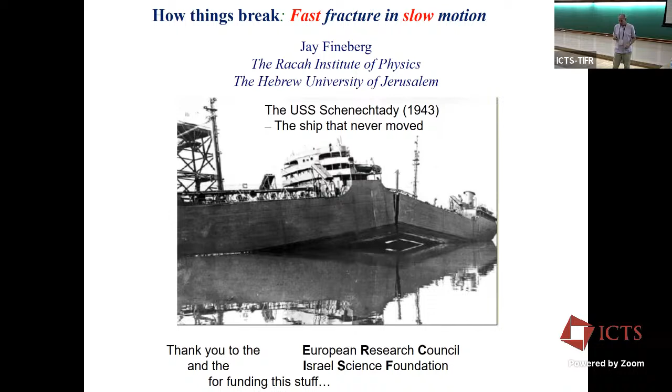Okay, so first I want to tell you why cracks are interesting, and then I'll briefly tell you how they're supposed to behave according to the standard or classical theories. And then we'll have a happy - this is a manic depressive talk.

The happy part now is that I'll show you that yes, they work when they're supposed to work. The theory is wonderful and everybody can go home. But then I'll show you when things stop working. These are crack instabilities, which are not included in standard theories of fracture, not even in unstandard theories of fracture. That's when nature stops reading the textbooks.

I'll try to zoom in on these things by talking about fast fracture in slow motion. Gels were mentioned earlier. We'll be looking at soft materials—maybe that's why I'm here. Soft materials have many characteristics, but the useful one here is that they're soft, so the speeds of sound are meters per second instead of kilometers per second, which lets us capture very rapid effects in slow motion and hopefully understand them. I'll finish with a new theory for nonlinear fracture mechanics, a non-trivial extension of the classical theory, which I'll talk about here.

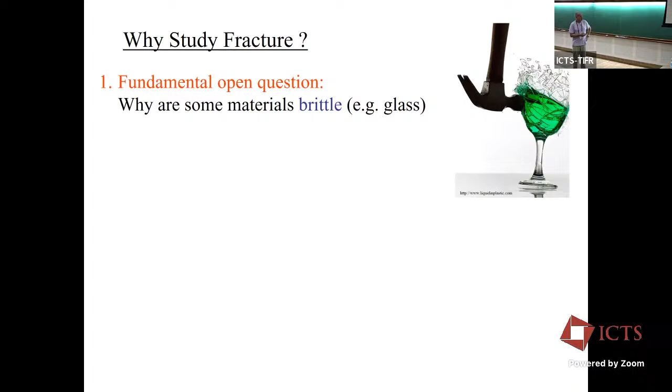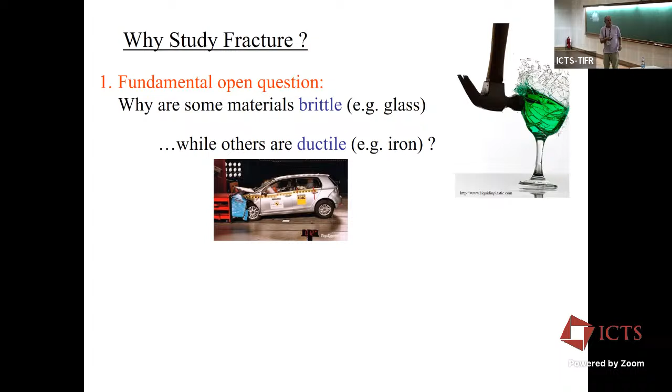Why should we study fracture at all? Well, first, it's kind of neat to be paid to break things for a living, but there are a number of fundamental open questions. For example, why are some materials brittle, like glass, where others you make buildings out of, or cars? The elastic properties of this and that are virtually the same, so what's the difference between a brittle material and a ductile material—something useful for building cars versus something useful for other things?

I'll show you that the theory of dynamic brittle fracture is incomplete, and these are some of the important unresolved questions. First, the criterion for where the crack decides to go—the crack starts to move, but to where? I'll talk a little bit about that.

Then what happens when a crack—we'll talk about theories in a two-dimensional world where we're looking at a one-dimensional branch cut or defect running through the material—but what happens when that one-dimensional point at the tip of a crack becomes spatially extended, so it's a crack front? What happens if you break the crack front? Again, this is the classic situation where the theory of fracture is a spherical cow, and little by little we're starting to make it an elliptical cow or something of that nature.

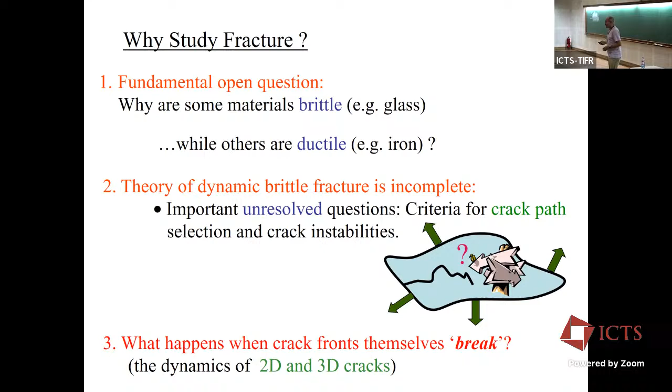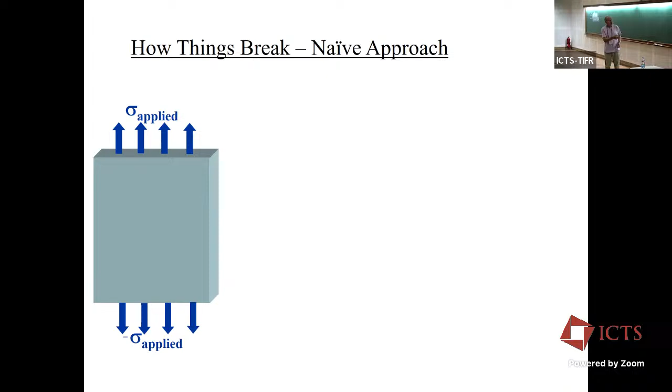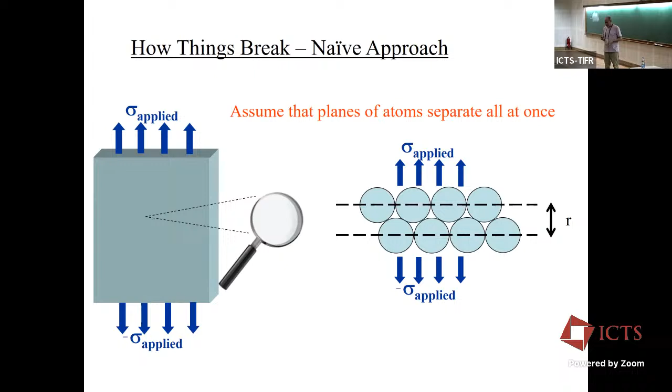Okay, how do things break? Well, the naive approach is you stretch something, apply a force, and pull the atoms, molecules, grains, or whatever apart in a homogeneous way. If you pull them far enough, they'll disassociate. So that makes sense—that's how things could break. Now, here's a potential between particles, atoms, whatever, and if you do the calculation, you find that approximately a 50% strain is needed in order to break something. So if you pull things homogeneously and slowly, you'll have to stretch it by 50% for dissociation to start. Okay, that's fine, things can break that way. But something's wrong in this picture, because usually already at 1% strain, things fracture. So we have two orders of magnitude difference between the naive approach and what happens in reality.

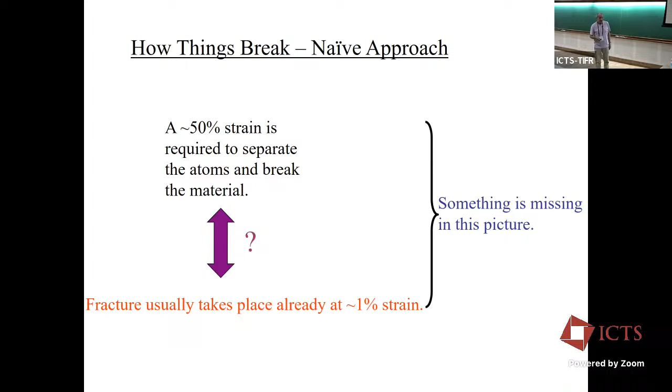Let's see why. The reason was given by Inglis in 1913, when he took a two-dimensional sheet of material—I'll be ignoring the third dimension for a while, so we're looking at a two-dimensional world. He put an elliptical defect into the material and calculated what the stresses are. The applied stress is totally uniform, but what are the stresses at the tips of the long axis of the ellipse? This is what he found: the stress was amplified by a factor of 2 times the length of the ellipse divided by the curvature at its tip, to the power of one half. Okay, so this makes things.

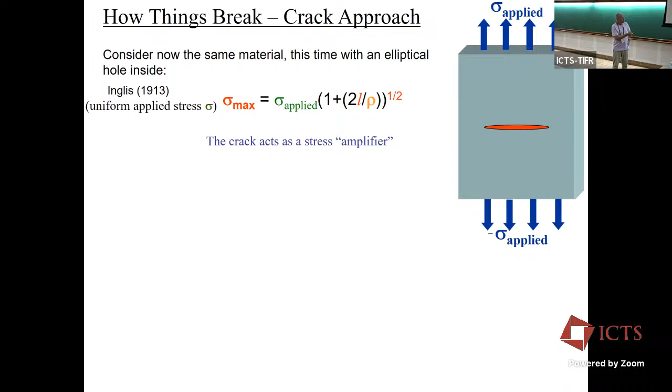Now what happens though if we start to take this ellipse and squash it? The curvature gets larger and larger, or the radius of curvature gets smaller and smaller. So what we find is that if we take the limit of squashing this ellipse to a straight line—this is now a crack—the stress at the tips of the crack becomes singular.

In fact, the stresses go as some factor K, which the experts call the stress intensity factor, divided by the distance R from the tip of the crack to the 1/2 power. So as R goes to 0, the stresses at the tip of the crack become singular. This is the reason that things break at much less stress than one would naively calculate.

And the reason is because this is an honest to God real world singularity. Anytime you have a defect in a material, a crack, you're going to get that singularity at its tip.

Now, you're all familiar with similar things. Some of you might be familiar with singularities in black holes—not talking about that—but we're all familiar from first year physics with the singularity of the electric field at the tip of a point electrode. The pointier you get, the higher the field is. This is slightly different physics, but it's the same idea.

So what cracks do is they focus the elastic energy that's being applied at the boundaries into this singularity. Bonds are not broken uniformly, but in a very efficient manner, kind of like dominoes. This stress singularity will break the material bond after bond right at the tip, and it makes materials much weaker.

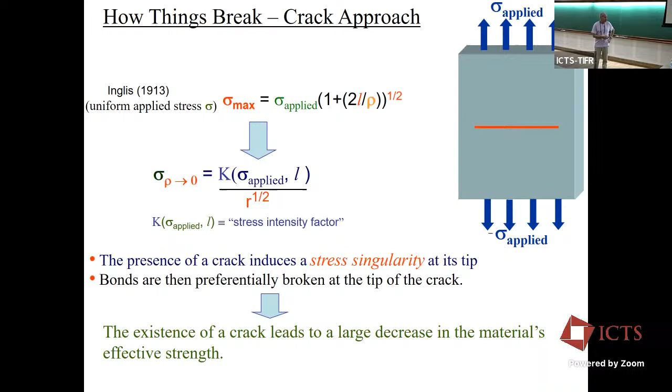So, the bottom line is the existence of a crack leads to a large decrease in a material's effective strength.

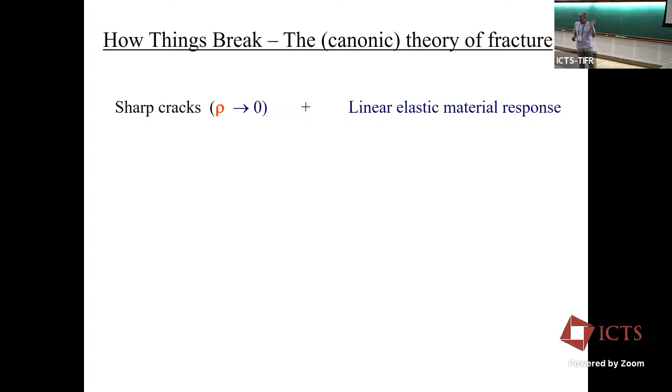Now I'll sketch this out—I'm an Israeli, so we tend to explain things while standing on one foot. If you're unable to explain something while standing on one foot, according to some of our sages, you really don't understand it. So I'll try to give you the quick overview of what's in the theory of fracture, where it comes from.

This theory of fracture is called linear elastic fracture mechanics. The theoretical background is that you have wave equations in the bulk—two wave equations, because we have shear and compressive waves—and they're only coupled at the boundaries. So all of fracture, if you actually solve the problem, is given by solving two uncoupled wave equations that are coupled on the boundary. And the boundary is very non-trivial.

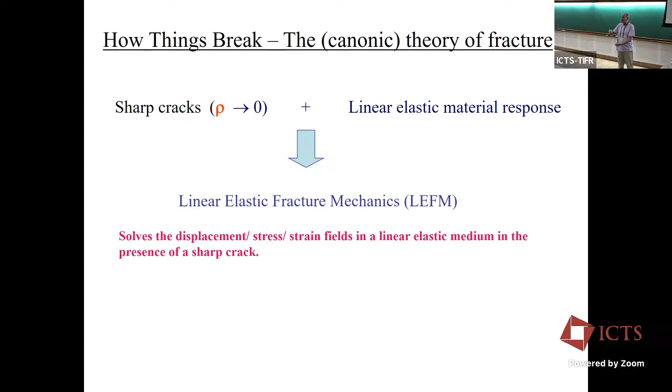We have stress-free conditions in back of the crack because it's broken, so there aren't any stresses in its wake. And there's something called mixed boundary conditions: in front of the crack, you have a displacement condition, how stretched it is. Solving that will give you what I'll tell you about in a minute.

So the main assumptions are that we're talking about small strains—that's where the linear elastic part comes from in linear elastic fracture mechanics. The strains in the material are all very small, and there's an assumption that the strains are small up to where dissipation takes place at the tip of the crack. In fact, the only place where energy is dissipated in this system is where material is broken at the crack tip.

So everywhere around it, life is conservative. And all of the stuff that we really don't understand—this is the proverbial rug under which we sweep all the stuff that we don't know—is contained very near this singularity.

Now, if you solve the problem—solve the two wave equations with these boundary conditions, stress-free and displacement boundary conditions in front of the crack—this is what you get. You get this, like Inglis showed by squashing the ellipse, you get the same solution: a singularity that goes like 1 over the square root of r, times some factor which is dependent on the applied stress, on the instantaneous length of the crack, and on the crack's instantaneous velocity, times some universal angular function.

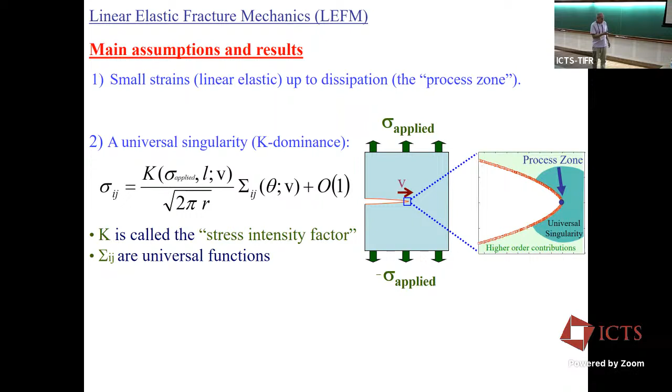Now, cracks are stable, so you can have a crack, and even though it has a singular stress at its tip, it won't necessarily move. Why? Because it's not transporting enough energy to the tip in order to break bonds, to satisfy the dissipation at the tip of the crack.

So a crack will move when the energy flux, which we'll call G for reasons that I've never understood, the energy flowing in from the elastic fields into the tip of the crack, is equal to the dissipation. And this dissipation, gamma, is called the fracture energy, and it's considered to be a material property—something that each material has.

And it's not just the cost to break a layer of bonds, as we'll see in a bit. Those of you who had enough coffee and are awake understand there's already a large contradiction in this statement: how can I assume small strains on one hand, and on the other hand talk about the singular stress at the tip of a crack where all the good stuff takes place? That's something people didn't worry about until relatively recently. I'll talk about that towards the end of this hour, where we have to extend fracture mechanics to nonlinear elasticity at the crack tip in order to better explain what's going on.

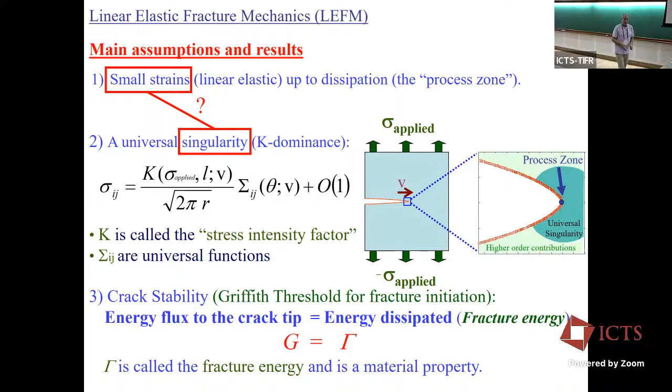So, in fact, I'll do an experiment for you. I'm an experimentalist—actually started my life as a field theorist, believe it or not. I calculated incalculable integrals for a living, and then wanted to know at the end of the day whether my calculations were correct. When I asked the wise people around me, who I respected and still do, the answer was, well, it doesn't contradict anything. That was not the answer I was looking for.

So as a result, I decided to go into a field where I get the correct answers all the time, but generally I don't know what the question I should be asking is.

So that's experimental physics. Okay, sheet of paper, nothing up my sleeves, as you can see.

I've eaten very well while I've been here. A bit spicy, but very well.

And I do this, and there's no way in the world that I'm going to be able to break this piece of paper. So this is tensile stress.

Okay, now, if I make a small initial crack, so I'm creating the conditions for a singularity. Now, if I pull it very, very gently, this crack will be stable, nothing will happen, but it doesn't take much to do that. So you're just seeing the singularity working.

That's what we're talking about. So even a small micron-sized singularity in a given material, the defects in the material will weaken it by orders of magnitude, which I just showed, and you can repeat this experiment when you get bored with the rest of this talk. So it works also in your chairs. Okay, sure.

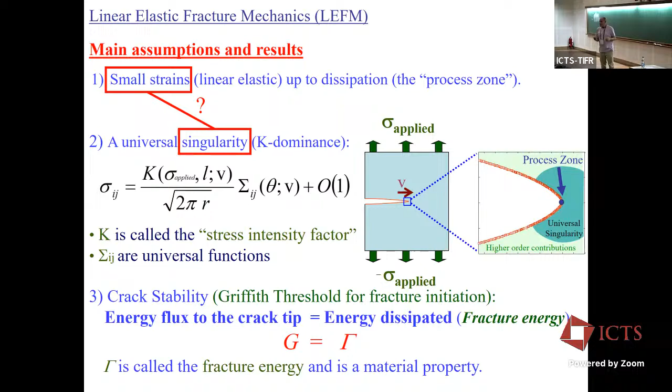Okay, great questions. Thank you for them.

It's funny though, you can approach the theoretical strength of a material if you get rid of the cracks. With a 1 millimeter diameter glass fiber, you can lift a grand piano. It's strong enough.

You can actually do that if you make fused fibers with zero defects and you acid etch them to get rid of all the little cracks on their edges. You can lift incredible weights. Personally, I wouldn't stand underneath that grand piano though, but if you're very, very, very careful, you can approach the theoretical strength of a material, but it's almost impossible, as an experimentalist at least.

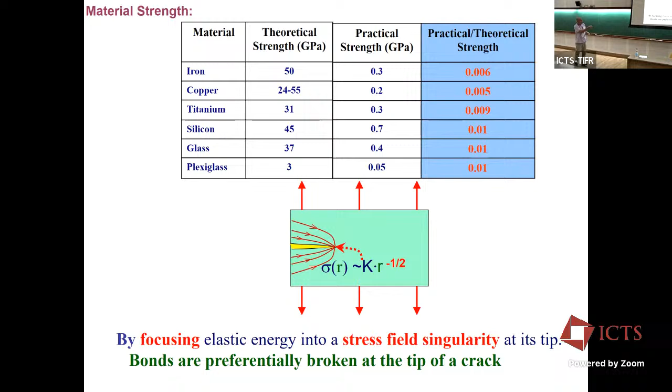Okay, so the cracks focus this elastic energy into this stress field singularity and preferentially break bonds. And that's why we get this huge reduction in material strength.

Okay, now to the question about ductile brittle. This is a calculation of this singular stress field here. So here's our crack. The stresses are color-coded. Blue is zero stress. The initial stress is this light blue here, and this is our stress singularity, what looks like an ice cream cone, a very pointy ice cream cone.

So cracks are interesting as a physicist because they're really singular objects that propagate. As we'll see, they accelerate up to the speed of information in the material. So that's what makes them interesting, but also a little bit difficult to study.

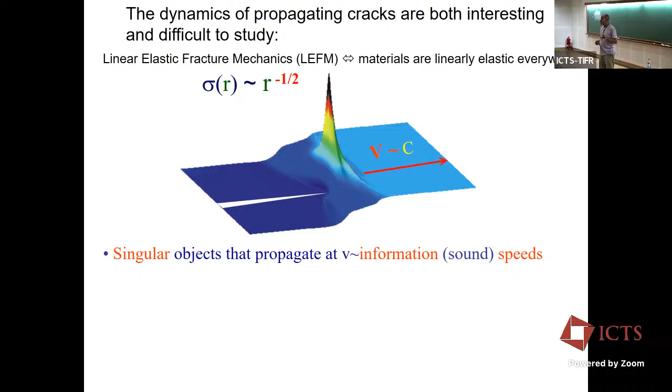Now, back to this question: what's the difference between a ductile and a brittle material? Well, the thing is that nature does not really suffer singularities, not mathematical singularities. So materials will act as the stresses become larger and larger in order to blunt the singularity. There's no real infinities in nature.

Now, the only difference between a brittle material such as glass and a ductile material such as steel is how nature, or how the material, flows around this singularity in order to regularize it. And that's something that's not very well known, how it's done for different materials.

For example, crystalline materials create defects, so you start to get more and more defects and dislocations. But glass, for example, is an amorphous material, so there aren't really any defects in glass, although the people in glasses might differ on that.

A plastic, like plasticky plastic or something, can be incredibly tough, something like polycarbonate, but that's also an amorphous material. So the way that the material organizes itself at the tip of the crack to blunt this mathematical singularity, and all the materials start to develop this as they get closer and closer to the crack, will determine how strong a material is, or how tough it is.

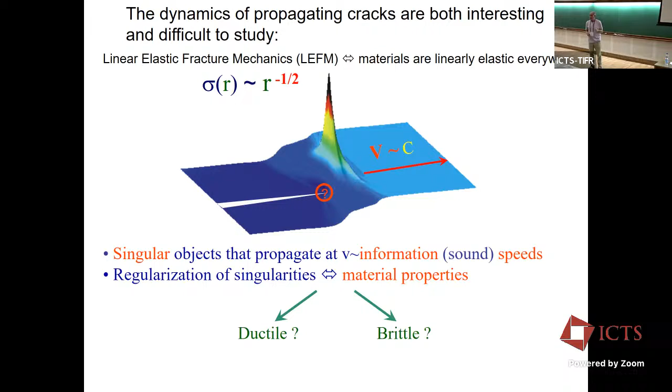Now, there are three different modes of fracture classically. There's pure tensile fracture, so that's mode 1, and that's what I'll be talking about mostly all the time today. There's also mode 2 fracture, which I'll mention tomorrow and also when I talk about friction, and that's applying shear.

So this is one material, and now I apply shear in this direction, and that's mode 2 fracture. These are all very close relatives, and mode 3 fracture is out-of-plane tearing fracture. So all of these exhibit the same stress singularity at their tip, but the coefficients are a bit different.

Okay, so today we'll be talking about mode 1 fracture. Right now I'm going to hand-wave and derive actually a quite correct equation of motion. To do that, I'm going to follow the argument that was originally put forward by Neville Mott to explain the broken ships. Okay, so we're going back in history.

And so here's our system. We're applying, at infinity, a large infinite-sized plate—ships were big in those days—some stress sigma infinity at the boundaries, again under pure tension. We're assuming that the instantaneous length of the crack is L and its instantaneous velocity is V.

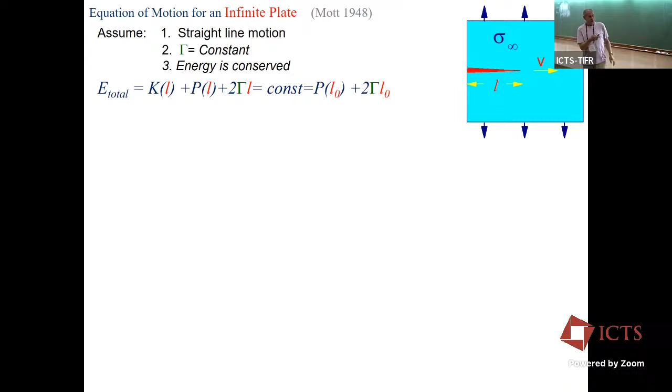Now we're going to solve this problem using dimensional analysis. So I'm going to hand-wave—I'm an Israeli, we do this very well. We're going to use the fact that this is an infinite system, so the only length scale in the problem is the length of the crack L. So all of the fields—U is the displacement field in the material—they have to scale with L. So now let's just write down the expressions for the kinetic energy.

So the kinetic energy is mv squared, rho is the density of the material. The temporal derivative of the displacement field is just the particle velocity, the motion at each point within this material, and we're integrating over all of that. So that's the kinetic energy, the motion of each point within this material.

And we're assuming that the crack is moving at velocity v. So instead of a temporal derivative, we'll replace it with v times a spatial derivative dx. And then we'll make a jump and say this has to go like v squared, this is the speed, times L squared, because we have a quadratic expression in the displacement field u, so it's v squared L squared times some constant of integration. Now let's do the same for the potential energy.

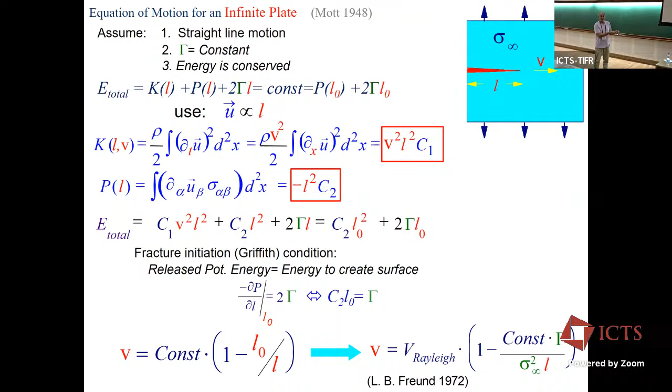Stress times the strain gives you a K squared. And so the energy flowing into the tip of the crack is related to K by that expression. So we're still talking about the same thing - we're talking about a balance of energy flowing into the crack. This balance can be either local or global, like we did before, but it's the same thing.

Now we're just zooming in, since we know what the singular fields look like. As we get very, very close to the singularity, we can ignore everything else and just look at the singular fields. That's classically what people do in fracture mechanics. What I showed you was the unclassical way how fracture mechanics was derived in the first place. But...

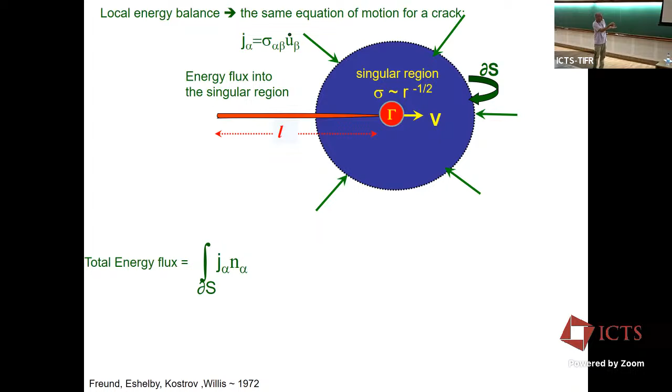to do exactly the same thing is just looking at the flux of energy. Again, stress times strain, each goes like K over the square root of R. And when we do that, what you find is the same thing we just derived. So this is, let me see, yeah. So if you do it microscopically - and actually this talk does talk about microscopics in that sense - then you get the same equation of motion. That's what happens when you do it the way that most people do it.

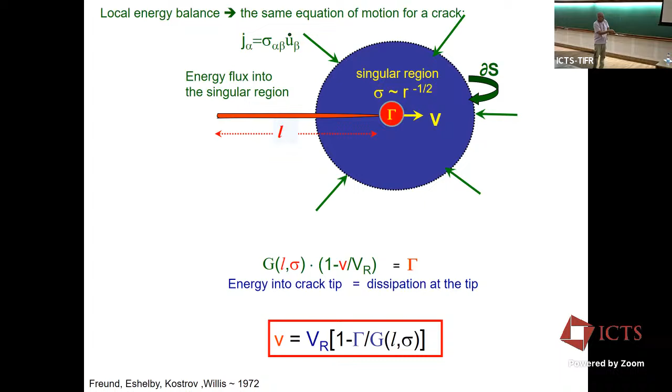So again, you have here the Rayleigh wave speed, 1 minus gamma, divided by the energy flux per unit area into the crack tip, which is G, and that's a function of the instantaneous length of the crack and the stresses that you apply far away.

Okay, so some of the miracles of this equation of motion. So we've assumed linear elasticity until dissipation. Here's a scale where dissipation takes place. So linear elasticity dominates near this singularity here, near where it's trying to become singular. It gets cut off somehow near the tip, near R equals 0, near where dissipation happens.

Now there are many other contributions to the stress field. This is just the dominant one as we go close. And usually in fracture, because this is the easiest one to deal with, we talk about just the singular fields, and we ignore the higher order terms, which is fine.

We've assumed an infinitely large medium, and when we do that, this equation of motion actually is very strange, because the velocity here is an instantaneous function of the length of the crack. There's no acceleration term here. It's almost like, well, okay, first we have this asymptotic speed. Now V is first order in time, or with the crack. So the crack has no inertia - it's almost like a massless particle.

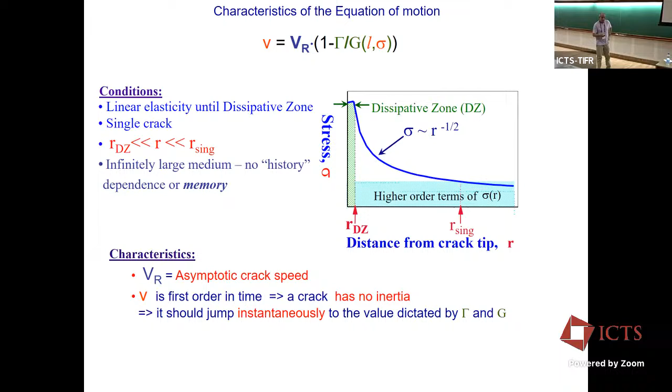That's kind of weird. Let's check it experimentally. So I'm an experimentalist, so we actually did this a number of years ago.

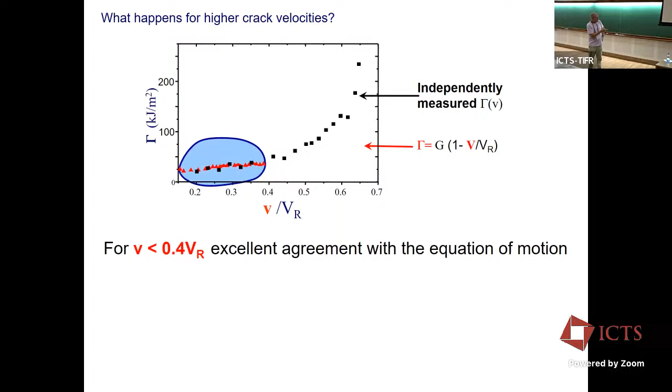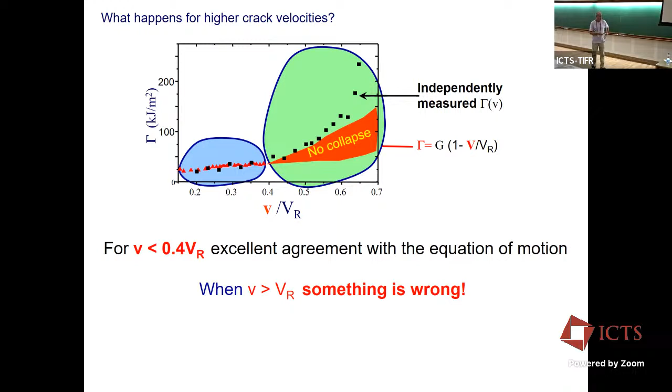Okay, so can we go home? Well, what happens beyond this critical velocity is that - okay, so this is the same measurement here. This one's for plexiglass, I think. And this is independently measured gamma, which I can tell you how we did it, but it doesn't matter. And here's where our collapse is. And over here, if we use the equation of motion, it's a total mess. Something is wrong. We have no measure of, we can't explain why the fracture energy all of a sudden goes up and the equation of motion totally fails. And this happens at a velocity which is about 40% of the asymptotic velocity. So it's telling us something is wrong.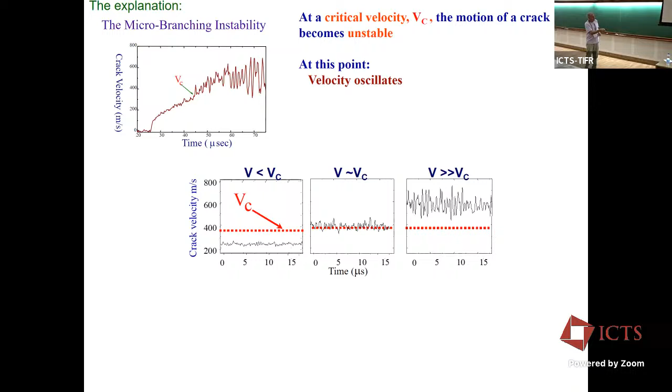Now, if we look at the fracture surface - okay, now what's the fracture surface? This is our two-dimensional experiment, but it's not really two-dimensional, it has the third dimension. So we look at the surface that the crack has created, and that's what we're seeing here. Okay, so it's featureless basically below this critical velocity. And all of a sudden, at the critical velocity, you start to see structure appearing on the cracked surface. These little dots, they're not dirt, they're real things. And as we push the velocities faster and faster, the structure becomes more and more apparent and larger.

So if we look now from the side - we're taking our experiment and we're only going to look at half of it, just because I only have two hands. And we're looking now from this direction through a microscope. What we see is that, okay, at this point where we have simple cracks, no structure, everything is very boring, so we're looking just from the side here. These points here, if we look from the side, we see microscopic crack branches. So the main crack is going along this plane here, but we have these microscopic little guys that branch out and then die - they're arrested cracks. And as we drive this crack faster and faster, they become much more dense and larger. And then we already have a lot of complexity here.

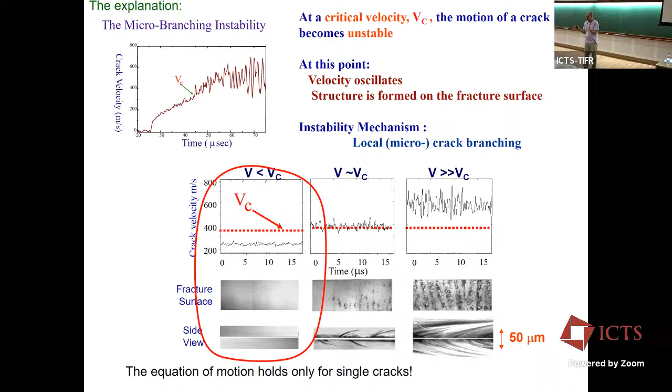Can I ask how you took these pictures? Oh, this was easy - just with a microscope with an objective that gives me a very thin field of view. Just scanning from the side, looking at pictures with light coming from the back. So whenever you have a crack, what it does is at the edges of the crack, they throw the light out in all directions - they're like very small lenses or something. And that's why you see black. And whenever there's not a crack, then you just see the light coming through.

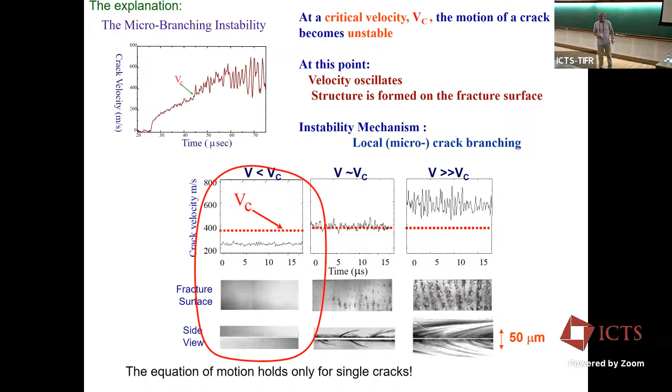Yeah, these are, sometimes the experiments are difficult. This one wasn't. Just the idea of looking there was kind of new at the time. Okay, sure.

The first graph shows crack velocity versus time, and the three-graph panel shows crack velocity versus time again, but that goes from 0 to 15, maybe 20. The zero isn't zero from the beginning of the experiment, it's just an arbitrary time. It's the same 15 microsecond window. The real zero here was probably about 100 or something, somewhere in the middle of the sample.

Thank you. Okay, any other questions? Yeah. Depended or not, that's what I'm asking. Wait, I'd turn on the microphone too since we're already using it, just for fun.

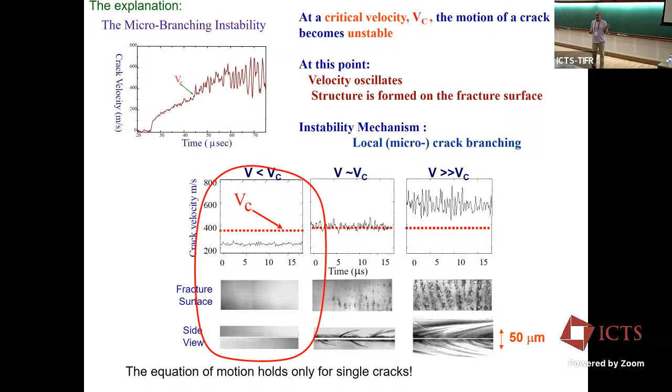Patterns are material dependent. Good question, I'll answer it in a few minutes. The answer is no, but I'll show you that for different materials you have exactly the same characteristics. Thanks for the question.

Now, these instabilities have been seen numerically, but no one really understands them. Some of the best minds in physics have tried to find the cause, and first people were looking at many nonlinear systems for an instability. But cracks are stable to infinitesimal perturbations—whatever you do, they're frustratingly stable. So according to that, these instabilities don't exist. We didn't really make them up though. If you look at a lattice, or MD, or finite element simulations, even phase field models, you see similar effects—you see an instability. People now are working to make it as quantitative as possible with phase field models, but you see it. So purely theoretically, these instabilities don't exist. In silico, they exist just like they do in experiments.

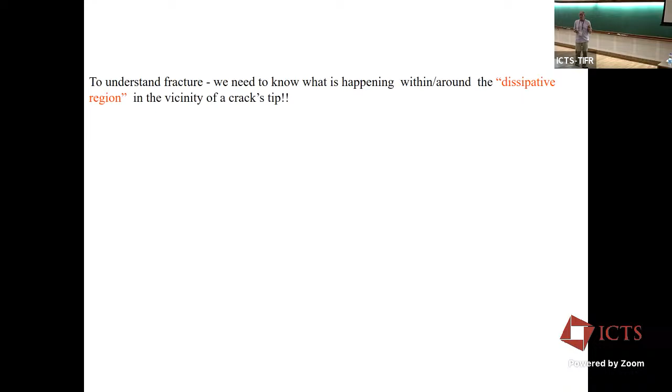And there's a size dependence here, I won't go into that. The bottom line is, to understand these instabilities you really have to know what's going on near the dissipative region—that's where all the good stuff is happening. When people perturbed a crack, they perturbed the linear elastic fracture mechanics crack. They didn't assume any nonlinearity at the tip because it's not clear what nonlinearity there is there. And when you do that, no matter what you do to a crack, it'll just continue along the axis of symmetry.

So there have been a number of empirical ways to model this dissipative region, some using phase field models, different types of models. There have also been attempts, spurred by these experiments, that took very good people to develop a theory of amorphous plasticity to try to solve this problem. They haven't solved it, but one nice thing that came out of these experiments is we now have a lot of activity in understanding plastic materials, shear transformation zones, and things like that. A picture of amorphous plasticity has actually evolved directly from these experiments—not directly, but the experiments kicked people into trying to get a fundamental picture of how materials blunt the singularity, how plasticity arises in materials that don't have any structure to them.

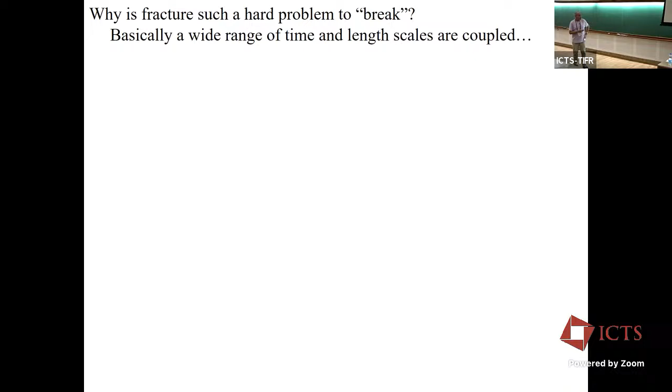So now, basically experimentally, the problem of tackling the fracture problem is that the velocities are so rapid that maybe when I was younger I could take a microscope to look at the dissipative zone running at like 3 kilometers a second, but I got older. It's become more and more difficult to run, probably with an AFM or something while doing it—a tough thing to do.

Also, the dissipative zone sizes are pretty small. In glass, they're considered to be nanometers, microns, and in PMMA or various brittle plastics, similarly small. So it's hard to see something that's really microscopic moving at the sound speeds of the material.

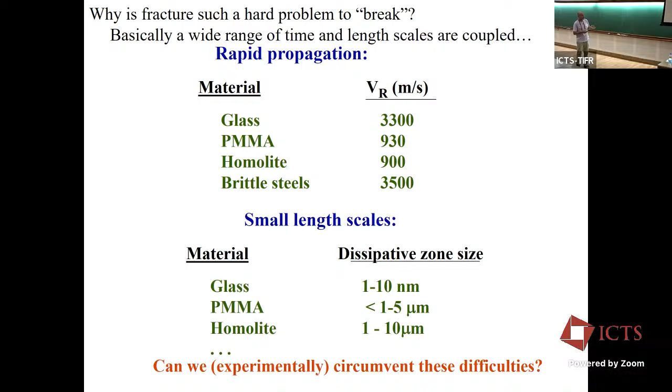Now, can we circumvent these problems? Well, yes, we can. And the way to do it, as came up in one of the previous talks, is to break Jello. Now, these are hydrogels. I could have gone to the supermarket and bought the Jello, which is kind of yucky, but since we were paid a lot of money to do this, we broke scientific Jello. I'll tell you about that in a moment.

In fact, many of you working in biophysics know this stuff. It's polyacrylamides, gels typically used in electrophoresis to look at how large molecules are. You run them in an electric field through an obstacle course, and the obstacle course is these gels. I was doing some bio experiments at the time, and we have slippery fingers sometimes, so we dropped some of these plates and they shattered like glass. This brought up the idea that maybe they're shattering like glass because they actually shatter like glass. So we started to work with these.

With these polyacrylamide gels, we can tune the chemical composition in various ways, and basically the Rayleigh wave speed goes down from kilometers a second to meters a second. Now, meters a second is already tractable. So the experiments I'll be talking about in a second were done with these gels, scientific Jello.

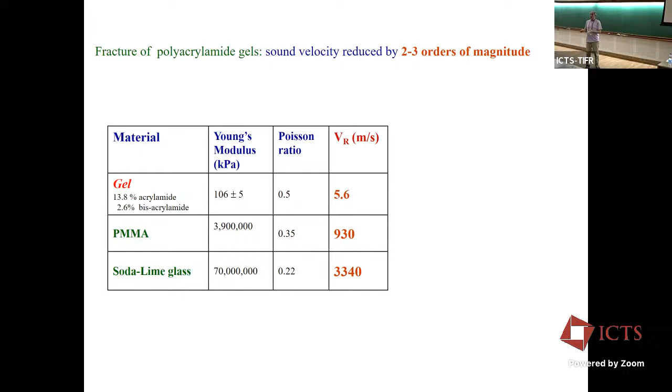But first I have to prove to you that everything that happens when you break Jello is exactly the same as what happens when you break glass or plaster, brittle plastics. So it's not just an analog experiment, it's a real experiment, just slowing things down. So that's the first thing we're going to do.

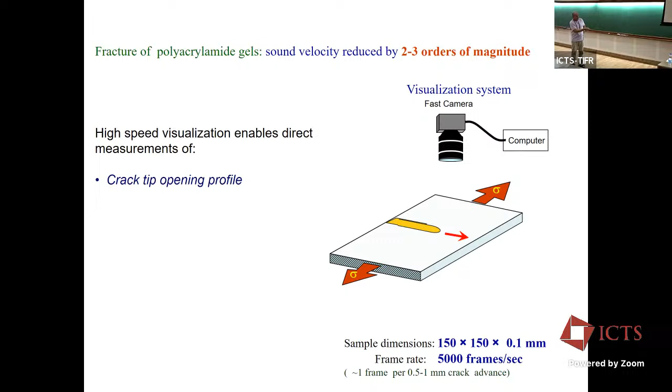So this is a schematic of the experiment. You have a thin plate, a sheet of this Jello, which we molded. You illuminate it from the bottom and look through a fast camera, so immediately you can see the crack tip as it's moving. You can measure the parabolic structure at its tip.

We've patterned the surfaces here, so we can use something like particle tracking or DIC to measure the strain fields throughout the system, just by looking at how particles deform. Eventually we went over to tiny little grids that we imprinted on one of the surfaces. So each snapshot of the crack gives us the entire displacement field, and we can take derivatives and get the stress and strains and all this kind of stuff. So just by slowing things down, we can do things that people never imagined they could do in this business.

So first I have to show you this is our instability. So this is a crack. Here 0 is the beginning of the experiment, okay? This is a comparison of brittle gels and glass. We have something that's relatively well behaved until it gets to about the same critical velocity, about 0.4 of the Rayleigh wave speed, and then it starts to wiggle just as here. So we find that the dynamics appear the same.

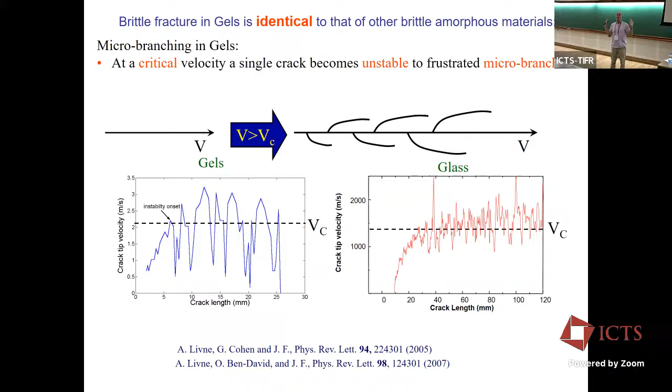Okay, but the structure that they create is identical. This is a picture of the fracture surface that was created here, in gels and in glass. You find these microbranches—this is the top part of the microbranch, and it goes into the material, but you can't see it here. They're actually very localized in the z direction, normal to the propagation direction, and they look the same in glass as well. So anything we can use to empirically characterize fracture in these materials, we see in these materials.

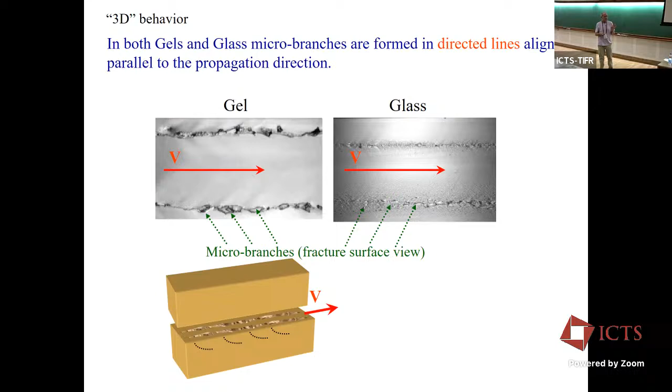As a result, we turned over and we're just using these materials to understand things that there's no way we could even get close to in more standard materials.

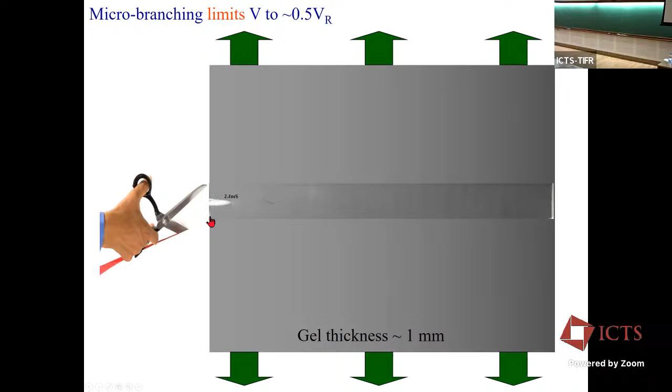This is just for fun—a movie of a crack propagating. This is the time, a clock in milliseconds. This is our crack moving around. It's now branching, also micro-branching here. This is the roughness.

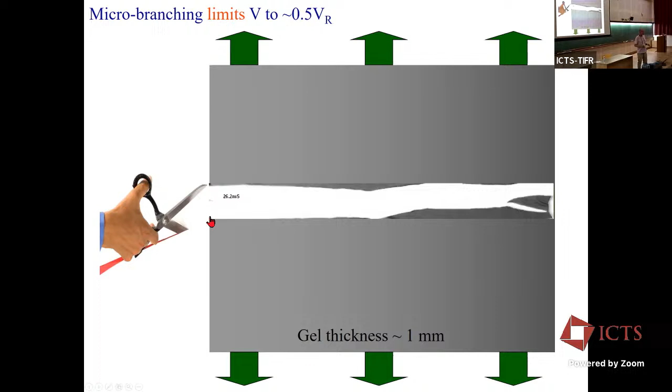Now, just to show you that we can do these experiments, we really do see real cracks.

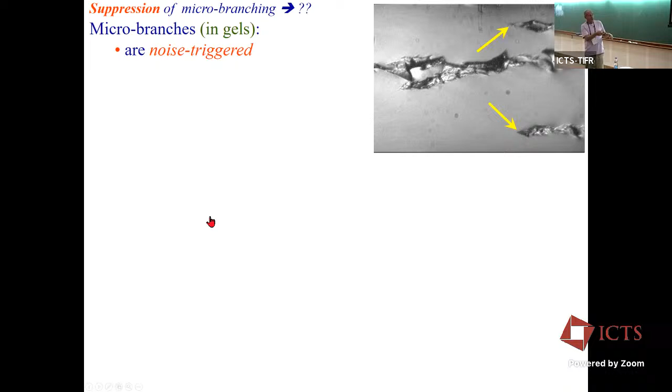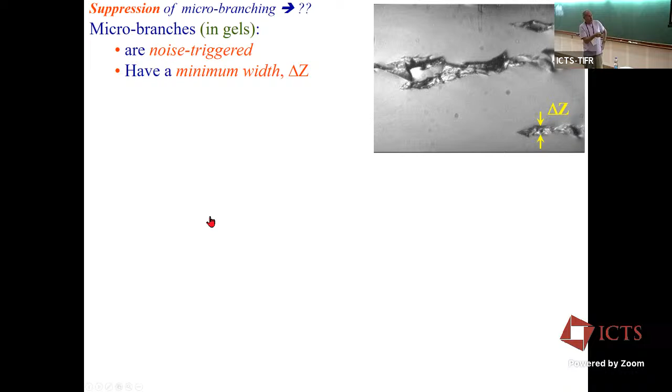Empirically, we can suppress crack branching in gels. How do we do that? Gels are basically noise-triggered, these instabilities. So these are the micro branches—they started here because the crack front moving through the material got kicked here and here. They have a minimum width to them. They don't expand over the whole surface, each one of these lines of microscopic branches. And when one of these guys hits an edge, this is a free surface, so they disappear either here or there.

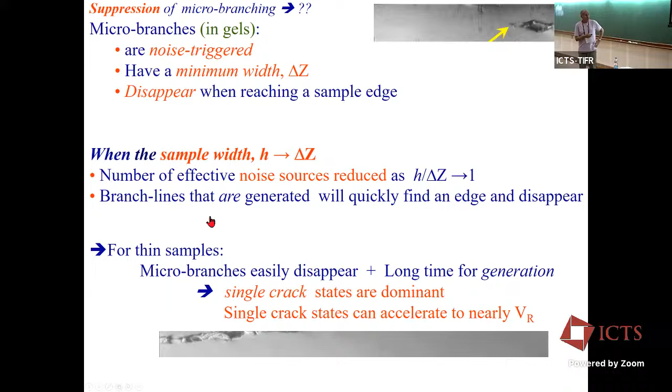As a result, if we make these samples thinner and thinner, we can get to a point where there are very few of these micro branches. They disappear, and we can have long sections where we have simple cracks once again. When we do that, we can test the equation of motion beyond the onset of this instability—we'll do that in a second. Right now, these single crack states, as I'll show you, can accelerate to nearly the Rayleigh wave speed.

Now, when we did that, we got a surprise. We expected that when we get rid of all the instabilities by suppressing them, we would see cracks smoothly accelerating up to the Rayleigh wave speed and just stay there, and everybody would be happy. What we found is we got cracks that smoothly accelerated up to the Rayleigh wave speed, and then slightly beyond the Rayleigh wave speed, something funny happened. I'll show you what that is.

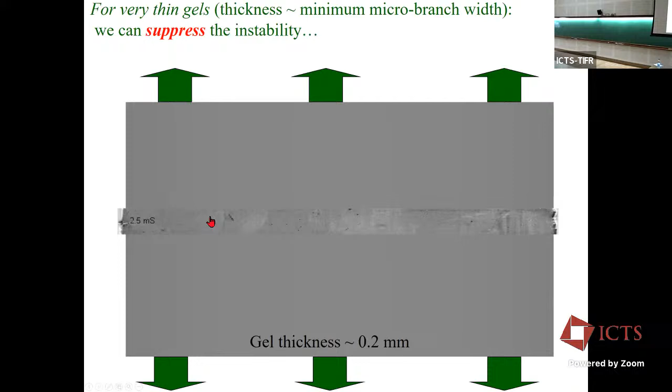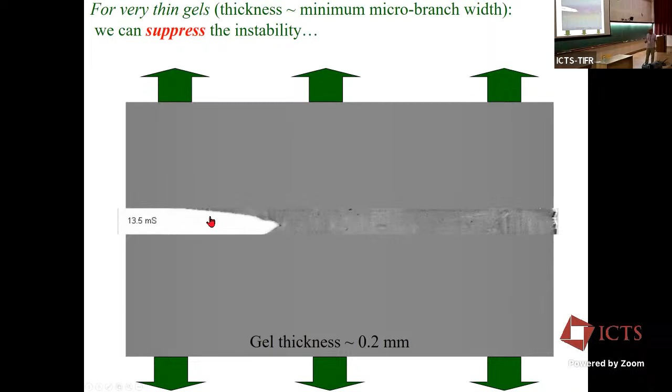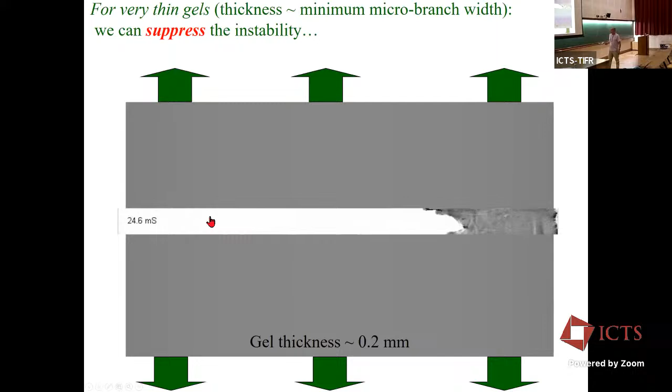So here's our crack. It's going faster and faster—smooth, not branching—and then all of a sudden, at about a little bit beyond the Rayleigh wave speed, it starts to oscillate and wiggle. This is one reason why I stopped doing theoretical physics, because my mind isn't fertile enough to guess this would happen. But if you just ask nature, nature tells you this is what I see, and then you have to think about where this is coming from.

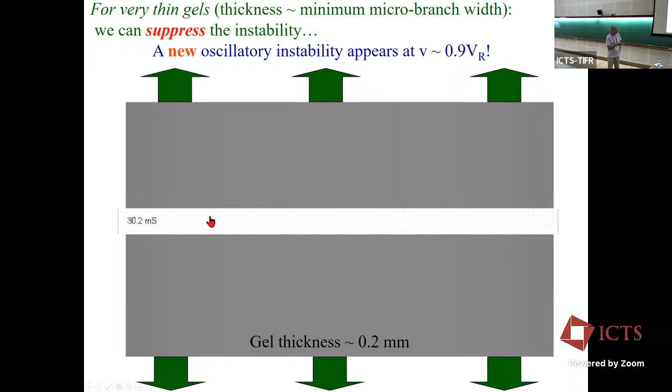So this is a new instability. It takes place at about 90% of the shear wave speed, 95% of the Rayleigh wave speed, actually. Now, let's forget about these instabilities, and in the last few minutes, I'll go back to simple cracks, and we'll see if we can understand simple cracks a bit better.

So we're going to suppress all of the instabilities, and we're going to measure the structure in the singular region as close as we can get, and compare it to what the classical theory tells us, the singular theory tells us. So the first thing I want to show you is the equation of motion that we derived before.

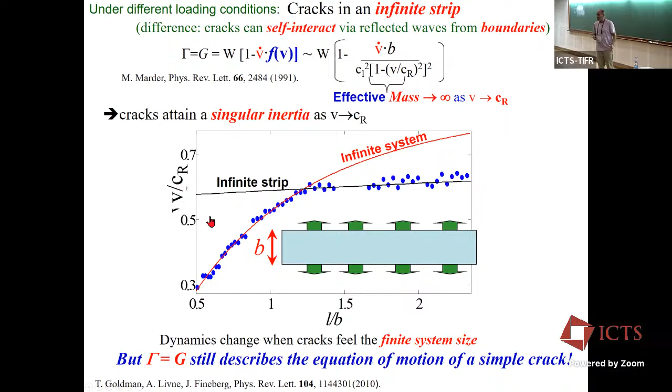Both of them assume they're basically driven by energy balance. The energy flowing into the tip of the crack is equal to the fracture energy, just different implementations of the same principle. Okay, so...

Let's go back to our singular fields, and we're going to use these gels in order to zoom in and try to see where the singularity breaks down, because it has to break down somewhere. How is nature doing it?

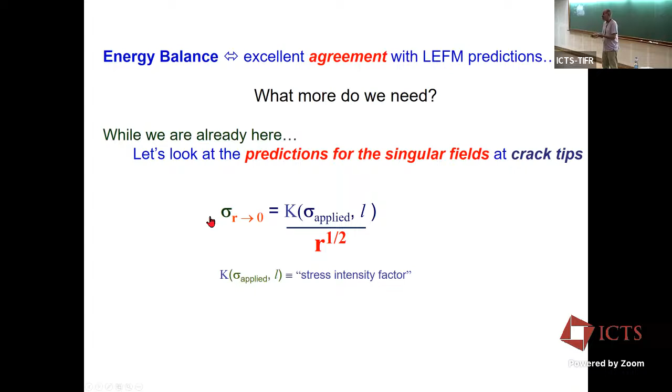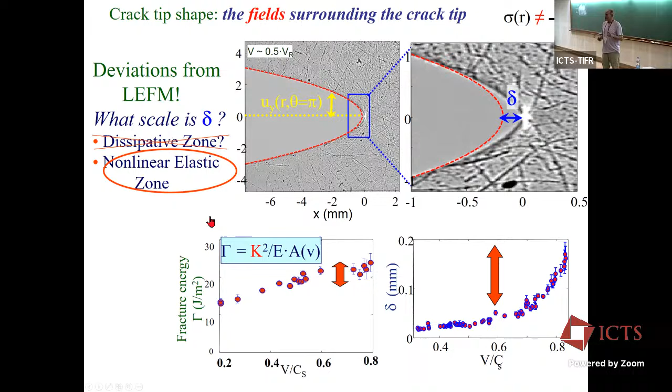So he came back after a month and says, I think I have it. We looked at it, and no, he had it wrong. So I sent him away again, and he came back a month later, and this time I really have it. And he did, and I'll show you what he came up with.

By the way, if we look at these experiments and compare them as a function of velocity to the predictions, this is the linear elastic fracture mechanic prediction of the strain field. We find that the faster we go, the worse the prediction, the theory seems to get. In fact, this one tells us that cracks should be under pressure, not under tension as you approach the tip. Something, and these are what we actually measure.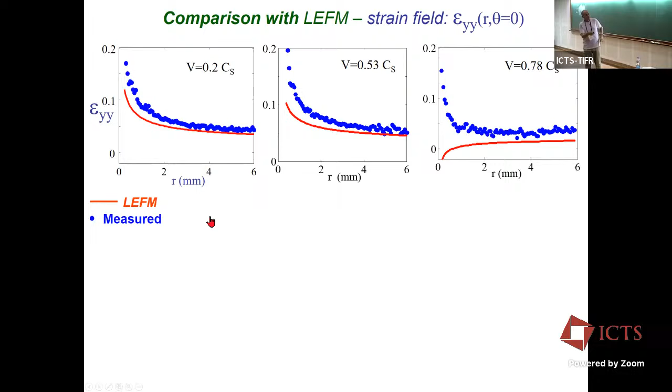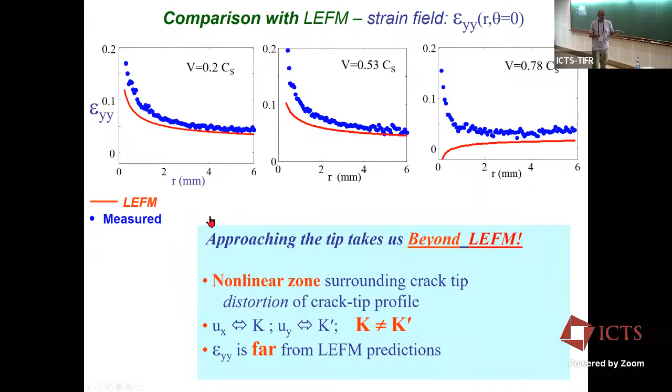So Eran, what he actually did was he re-derived fracture mechanics from scratch in a perturbative way using nonlinear elasticity, assuming a nonlinear piece of Hooke's law. There's going to be some details here, but that's what we're talking about.

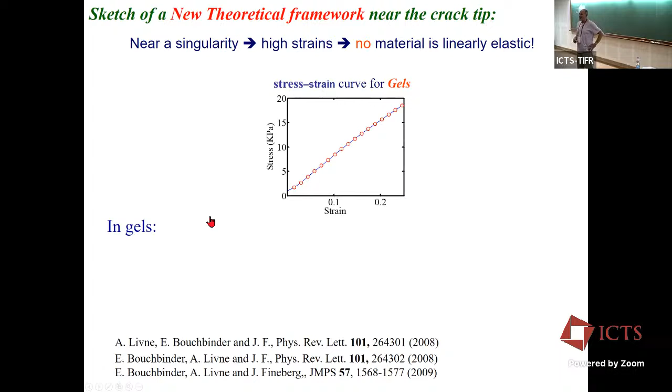So in gels, we can measure the stress strain curve, and it looks kind of linear. If you wake me up at 3 in the morning and say, is that a straight line? I would say, yes, go away. But if you do it carefully enough, you find that at strains of about 0.1 or so, the stress strain law, which is called for neo-Hookean materials, this is what it actually should be. It does deviate from linear elasticity, a small deviation. So what?

Again, he didn't have anything better to do, so he was working hard at trying to solve this. So he extended LEFM to include this weak nonlinear elasticity. Now, why do the nonlinearities have to be relevant?

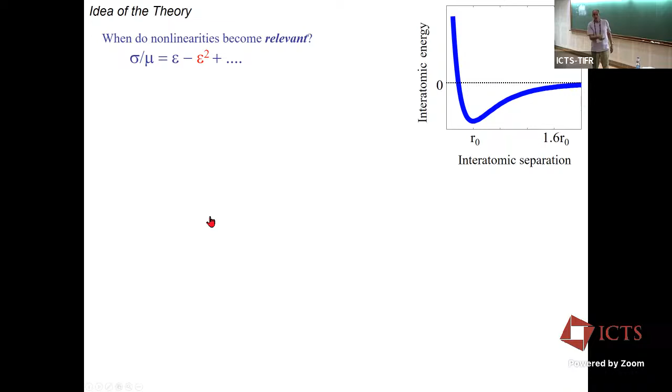Forget about gels. For any material, this is your potential curve. Hooke's law lives here, where the potential is parabolic. That's why Hooke's law or Young's modulus are relevant for small strains, because you're always talking about something near a minimum, and all minima are nearly parabolic, very close to the minimum, and that's where stress strains are linear. Now we're talking about fracture. We're out here someplace. So obviously we need to take corrections to this parabolic potential into account, and that's what Eran did. So, okay, I have 5 minutes.

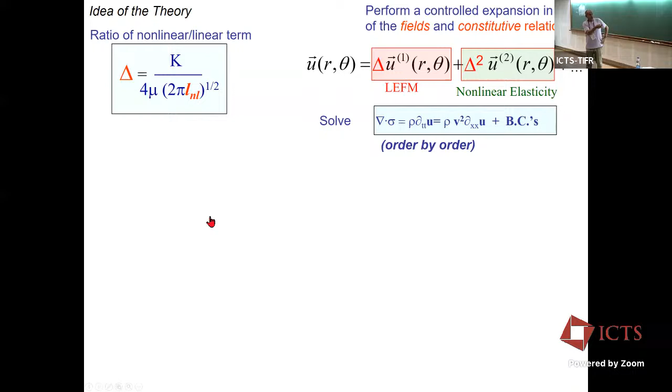Let me go very quickly through the details. So he found a small parameter, which is just the ratio of the linear stress strain, this is Hooke's law, and the ratio of the linear and first quadratic nonlinear terms. And then he solved fracture mechanics. This is just Newton's law written so no one can understand, F equals ma for a field, and that's linear elastic fracture mechanics. So he solved this problem, and then he used this solution to solve the second order problem, which looks much nastier, but it actually can be solved almost analytically, or mostly analytically.

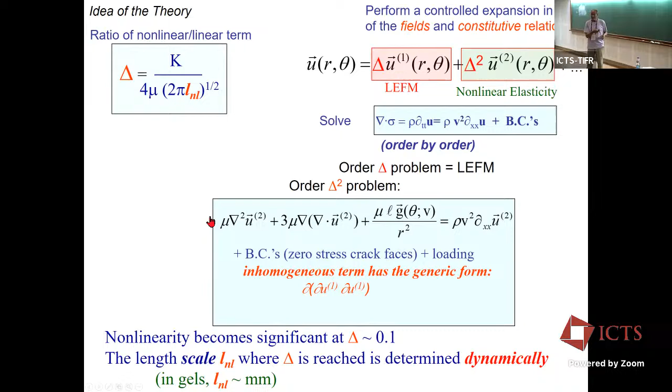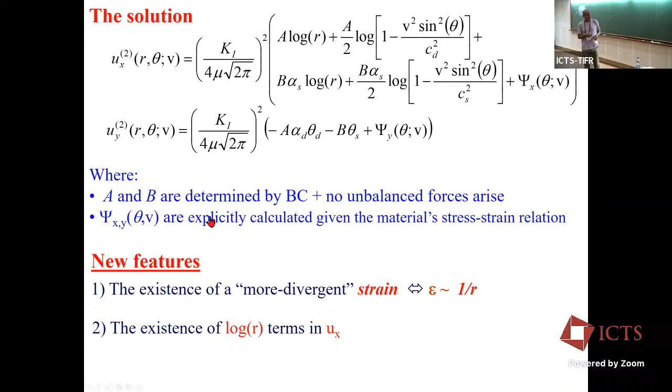And nonlinearity becomes significant at some strain, in this case about 0.1. This strain where nonlinearity becomes significant defines a length scale, how far away, and this length scale is determined dynamically. As the crack becomes faster and faster, this length scale depends on the instantaneous velocity of the crack. This is the solution. You can stare at it all you want, but the salient parts are that instead of regularizing the square root singularity, the singularity becomes worse. It becomes like 1 over r instead of 1 over the square root of r when you take into account nonlinearity. It also has logarithmic terms in the displacement along x, and you get this existence of a dynamic length scale that depends on the nonlinear coefficients, on the second order nonlinearity.

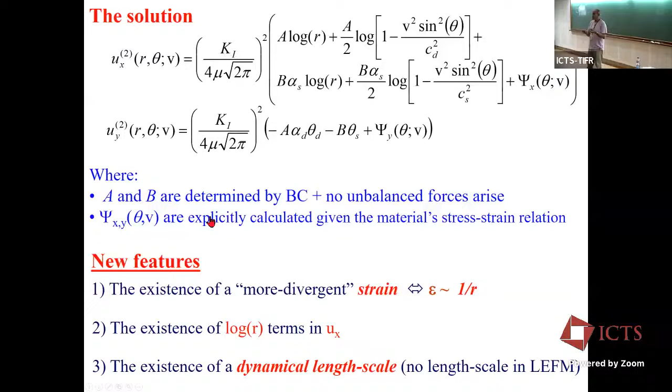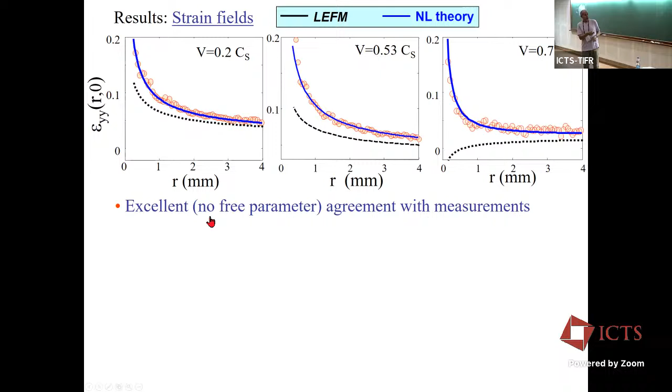Okay, so let's compare it to theory, or to experiment. Now this theory has no adjustable parameters because we can measure everything, and we did. And what we found is the blue lines are the theoretical description, and they actually pass through the points. The black dots are classical fracture mechanics.

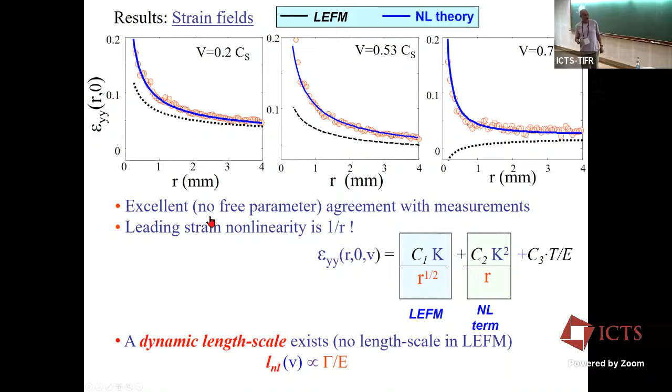So it was worthwhile having a theorist around and sending him away to calculate things, turns out. He's been doing it very well since then as well, for his own group. But sometimes theorists are useful. That's probably the bottom line of this talk. Often not, but sometimes there's a use for them.

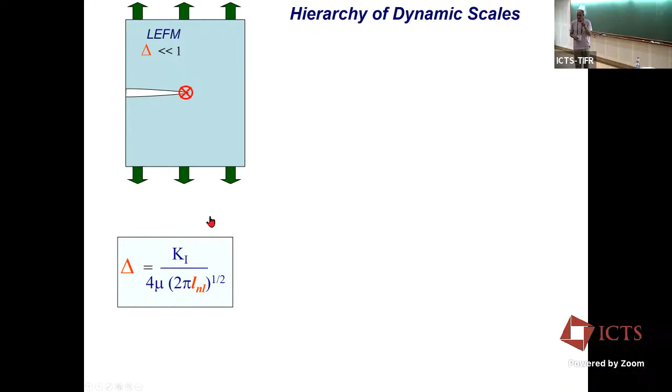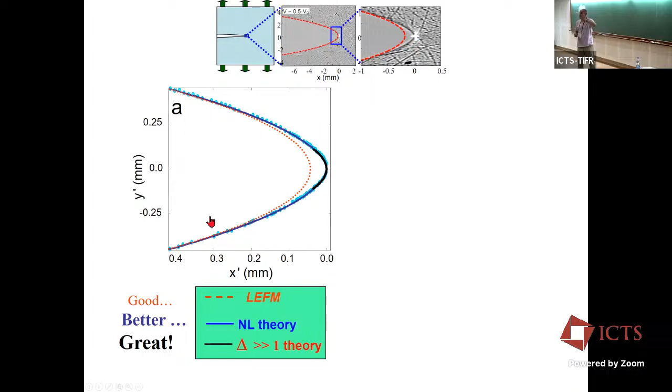So if we go back to simple cracks, this is the parabolic form of just the garden variety crack - this is what LEFM tells us. This theory has to be cut off here because it's a perturbative expansion. As you get closer and closer to the crack tip, it's not controlled anymore, so we can't use it. But we derived a theory just for very large strains where the equations become much simpler, so you can solve them analytically. The bottom line is we have a really good theoretical description of very boring cracks - simple cracks, no instabilities, no anything.

Now, this is just a preview for tomorrow - should we live so long. We'll talk about using this nonlinear length scale to actually understand instabilities.

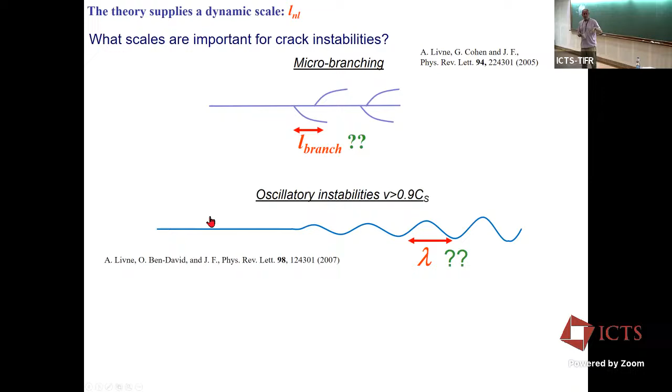It turns out that the physics at small scales, at the smallest scales near the singularity, are incredibly important if we want to understand the macroscopic behavior of materials as they break. These tiny little branches are small themselves, but they increase dissipation by an order of magnitude. So if we don't know about them, we find that a crack dissipates more and more energy for no reason discernible to the eye. That's a macroscopic effect. The microscopic effect is because you have, for example, this instability. What causes this instability is something even more microscopic, this very small region of elastic nonlinearity near the crack tip. So that's where we're going tomorrow.

And there should be a thank you somewhere. Okay, so this is what we've just done. We've derived an equation of motion. We've understood simple cracks much more than you would ever want to. Tomorrow we'll be looking at crack instabilities using this nonlinear scale - not next week, but tomorrow. But thank you for your attention.

Thank you for this lovely talk. And so what we have learned is theoreticians are sometimes useful.

Mike, I have a question. So I take the liberty and ask the first question.

When I was very young, there was some oil drilling. I come from the northeast part of India, and they blasted the earth down, and our house everywhere cracked. My father had to build a new house. At the time, I was so sad, thinking, oh God, do something and make it okay so that my old memory remains there. Then very recently, I heard news from Kolkata - there is an old steel bridge, iron, and there was an observable crack, and after a few days it was gone, it self-healed. So my question is, there are some materials like concrete that don't self-heal as far as I know, and there are some materials that do, like this Kolkata example. I'd like to really see how that happened. So is there any understanding of what makes some materials self-heal cracks and some materials never do that? Thank you.